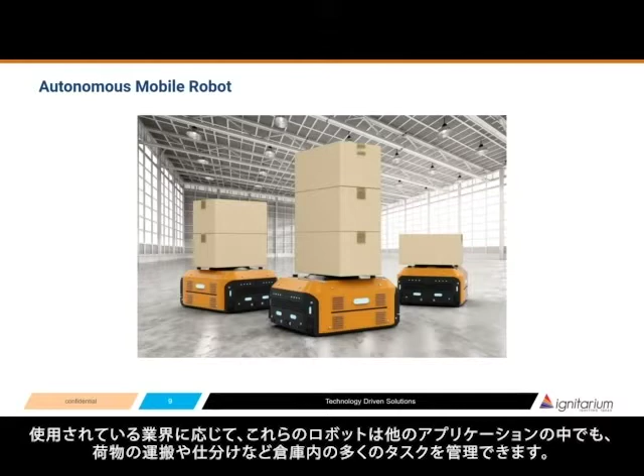So let me introduce you to the concept of mobile robots. There are mainly two options to go with, AMR or AGVs. These are robots that can manage many of the tasks in a warehouse, like transportation of packages, sorting, and many more applications.

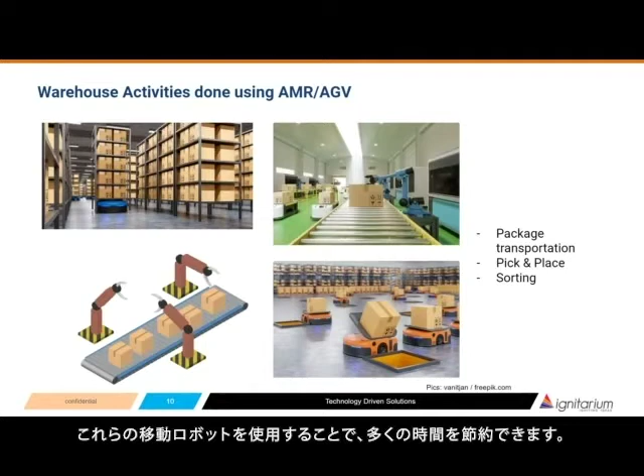Depending on the industry it's deployed in, these mobile robots could save a lot of time in package movement. So with respect to each other, AMR has an upper hand in the industry due to its scalability and cost.

AMRs are intelligent in that they can plan paths in the warehouse according to the surrounding situations, making them safer to deploy in industry. The dynamic nature of the robot makes it more scalable and cost effective, as it uses floor maps to navigate through the warehouse and obstacles.

At the time of warehouse upgradation, we just have to update the floor map and the AMRs are ready to roll out in the new workspace.

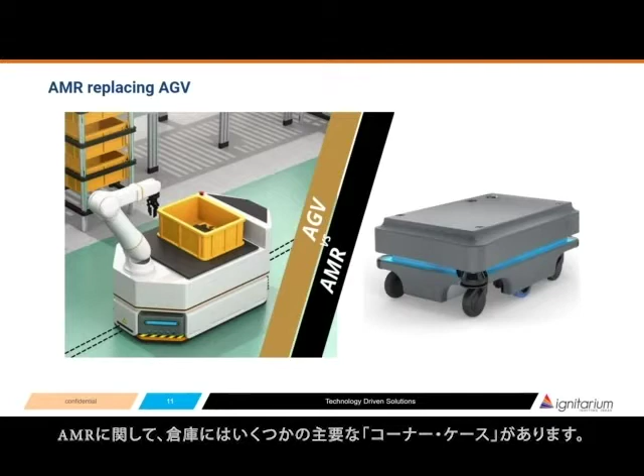As of now, we have gone through the use cases of AMR in the warehouse industry. Now let's see a few of the corner cases that have to be addressed, like navigation through a busy warehouse.

Then synchronization of the robot with external devices, robot orientation, obstacle avoidance, human safety. These are a few of the major corner cases in warehouse.

In this, we are going to primarily focus on robot orientation. Why is the orientation of the robot in a warehouse so critical? Let's see. Here you could see an image of a robot dropping a package onto a slot on the floor.

Now just imagine if the robot reaches the location, that's the point, and if it is oriented, say, 90 degrees off, then when it lifts the package and drops it, it will not fall into the intended slot, it will be lying around on the floor. Would that be what we would need? No.

Then imagine a case where a forklift is lifting a package. We know when a forklift lifts, it has to insert the fork into the slots provided on the package. Now, if the robot or the forklift is not aligned properly, then when it tries to lift the package, there are chances the package could topple.

And like a chain reaction, a lot of packages are going to fall down.

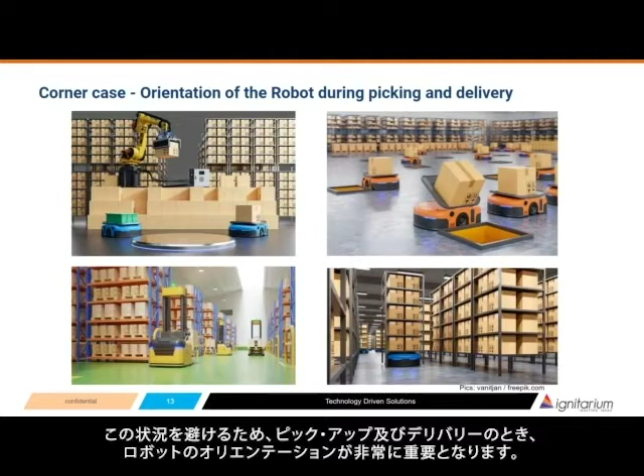So these are not the scenarios that a normal warehouse would appreciate. So here we could see the orientation of the robot during picking and delivery is pretty crucial.

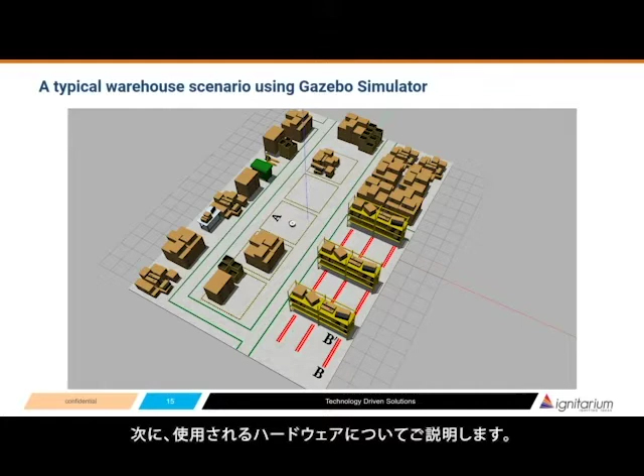In this simulated world, we are going to use the hardware Pioneer P3DX. It's a mobile robot that consists of cameras, lidars, IMU sensors, proximity sensors, and many more sensors according to the requirement and the situation where the robot is deployed. All of these are connected onto an embedded hardware which is capable of interfacing these sensors and also running the application in the background. We have a mobile base which would be carrying all this hardware on the warehouse floor.

In the previous slides, we mentioned the use cases and corner cases with respect to AMR. Now let's see how we can make it simpler and faster for development. ROS, Robot Operating System. ROS is basically a framework or a middleware that creates a pipeline for different processes to communicate with each other. Here, processes are called nodes. Each node communicates using topics and messages. ROS is widely used in robotics due to its scalability and large developer group. As ROS is an open source platform, plenty of resources are available online for your reference.

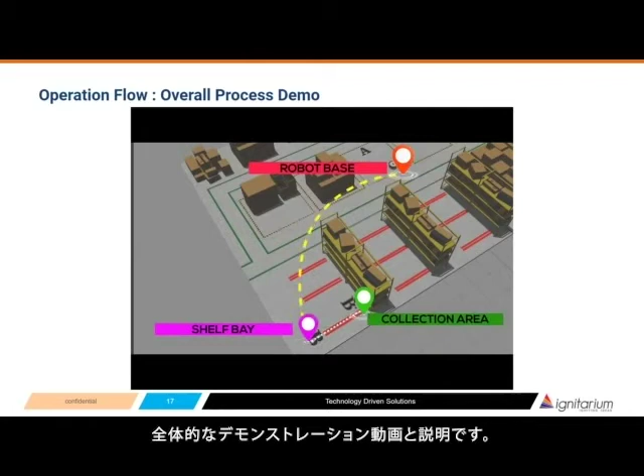Now let's see an overall demonstration of the process. Here we have set up this demonstration using the Gazebo simulated world. The robot basically has two modes of operation, that is full autonomous navigation and also action server based operation. The operator gives the destination B from which the robot has to pick up the package. Now here we could see A as the location of the robot as robot base, and also the shelf bay, that is location B, from which the robot has to collect its package.

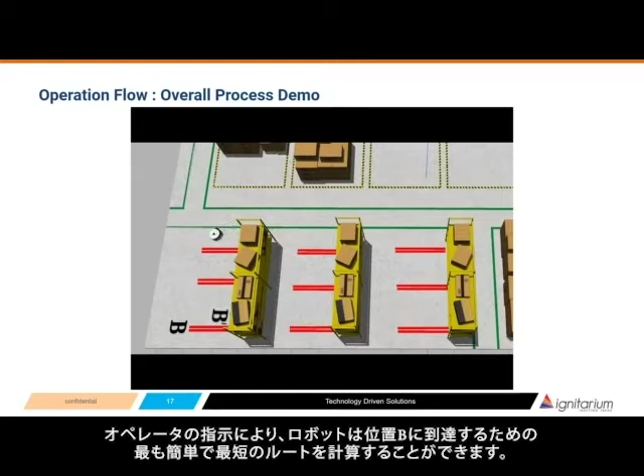For the first phase, the robot uses the autonomous navigation stack, a stack which guides the robot to move from location A to B. Here you could see the robot is computing a path and following it for reaching from location A to B, the command given by the operator. The robot is able to compute the easiest and shortest route by which the robot could reach location B.

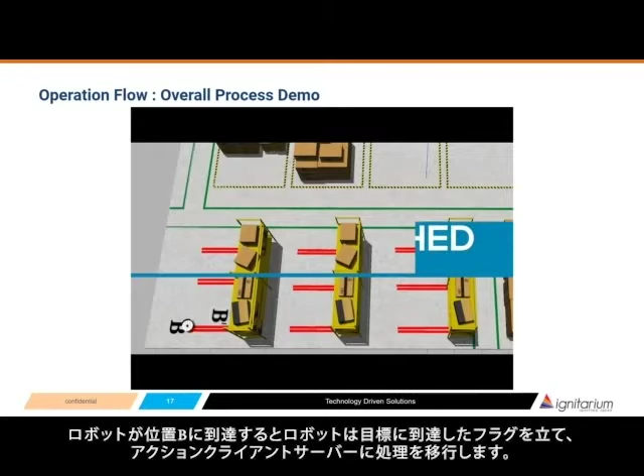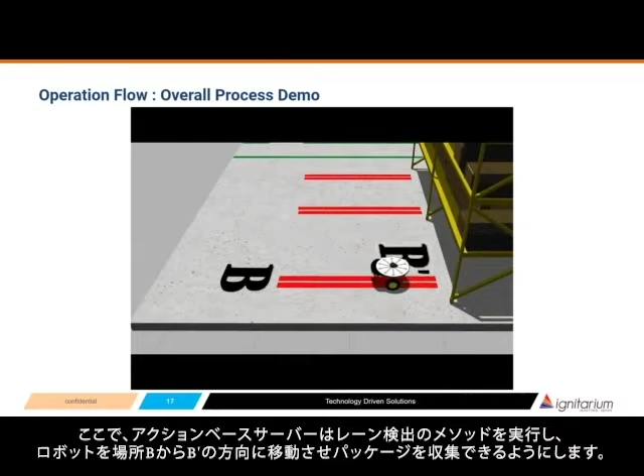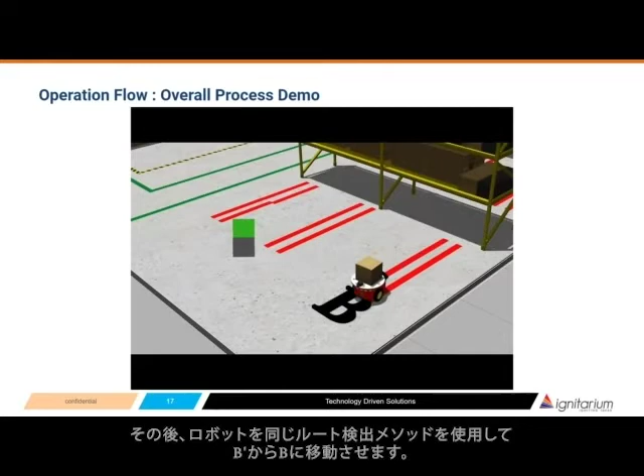When the robot reaches location B, the robot gives a flag as goal reached, after which the action client server kicks in. Here the action based server does a lane detection method to move the robot from location B to B dash, orienting the robot perfectly so that it is able to collect the package. After which the robot uses the same lane detection method to go from B dash to B. After which the robot uses the same navigation stack to go to the next location C, or it might be back to the robot's bay.

Now let's go deeper into the two phases of the process, that is phase 1, autonomous navigation, and phase 2, the action server based process. In the first phase, as we have told, it is autonomous navigation. The goal is to move the robot from location A to location B using the navigation stack. So here we know the robot is at location A, which is the robot bay, and B the destination.

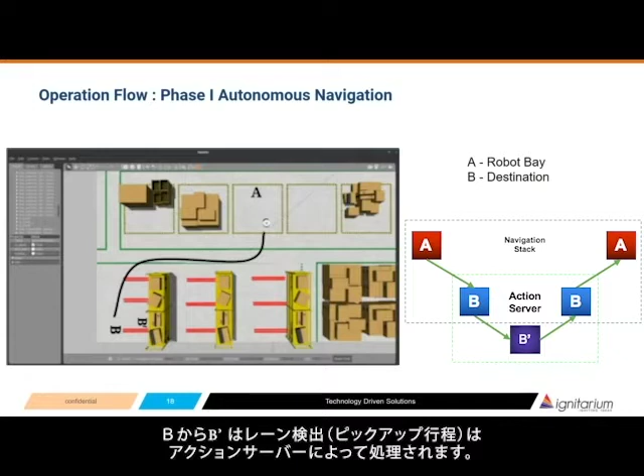B is basically a bit far from the exact location from which the robot has to pick the package. So the robot is using navigation to reach from A to B and not B dash. B to B dash is taken care of by the action server, with which the orientation of the robot would be corrected.

Before we move on with the navigation, we need to create a map of the floor. In the initial slides, I have told AMR's advantage is that AMR basically works with reference to a floor map. So we need to map the floor. AMR has an option called map building, for which we have two methods, that is manual mapping and exploratory mapping.

In manual mapping, what we basically do is, with the help of lidars or sensors, we will collect data and use algorithms to create a map out of it. In manual mapping, we will use teleoperation to move the robot manually over the warehouse floor and collect data. In exploratory mapping, we would just leave the robot free in the warehouse floor and it will map the floor on its own. And there are different algorithms used for both the methods.

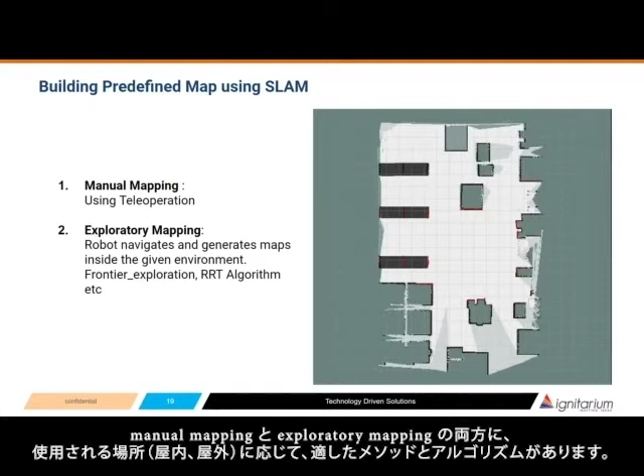A few of the methods are the SLAM methods, that is simultaneous localization and mapping. These are a few of the methods that are widely used: Hector SLAM, Cartographer, then Gmapping, ORB SLAM. There are different SLAM algorithms according to the places. These are more valid when the mapping is indoor. When we have outdoor, we have different kinds of algorithms to do the mapping.

On the right, you could see a matrix of comparison between different mapping algorithms along with different sources for the mapping. We could have Kinect, laser scanners, or a combination of laser scanner and a Kinect 3D cam with respect to Gmapping, Hector, and CRSM. That's another SLAM algorithm which is being used. And to the left, you could see a 3D map generated using depth cameras or 3D lidars, and all the different sensors are used to create the 3D map also.

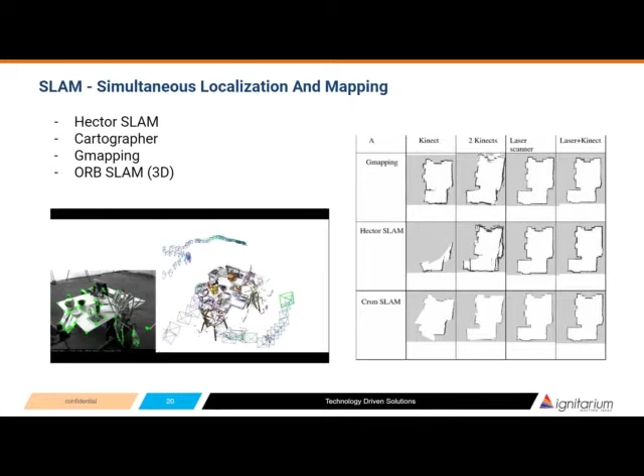Now let's come back to the ROS navigation stack. The navigation stack can be divided into four major blocks: first the sensory block, second the move base, third the base controller, and fourth the map server. The sensory block basically consists of lidar or 3D cam, which collects data from the surroundings into the move base node. The move base block is the block from which the path for the robot is computed. Inside the move base, we have basically two nodes, that is the local planner and global planner.

The global planner is responsible for computing the path in a global space, that is the rough direction for moving from location A to B. And the local planner is responsible for computing the path in a short distance. So imagine the robot comes across an obstacle. The local planner comes into play and computes an alternate path to avoid the obstacle with reference to the global path. So the global path is the one which is defined for moving from A to B, and the local path is what defines the robot's path for the few meters in action.

These two planners together give the velocity commands to the robot to move, and that is received by the base controller node. Apart from this, we have another block, the map server. We just created a map in the previous stage, and the map server will publish this map for the planners to compute a path in the global space as well as in the local space. So altogether, these four blocks are what we call the navigation stack in ROS. A detailed explanation of each block is out of the scope for this small webinar series.

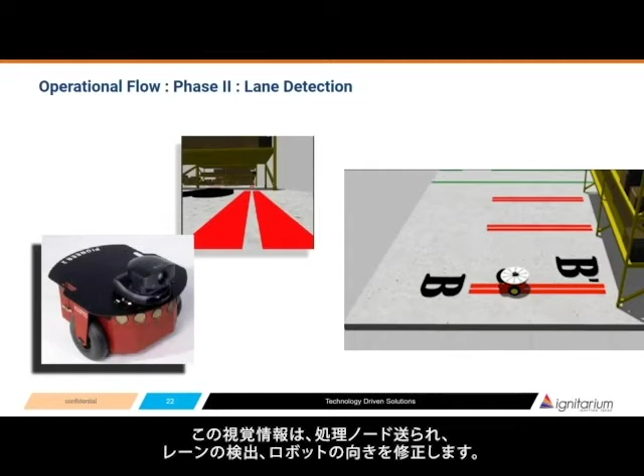Coming to phase 2, the lane detection. Here, the robot uses a vision sensor, that's a camera, to collect visual information from the warehouse floor. This vision information is fed to a processing node where the lanes are detected and the orientation of the robot is corrected. As a first step, the robot will be moving from location B to B' using the action client server method. The client will give a goal to the action server. Here the goal is B'. The action server keeps the client updated with the help of feedback messages.

When the movement from B to B' takes place, the action server keeps on updating the action client using feedback messages. During this time, the robot would use image processing algorithms and PID algorithms to orient the robot perfectly in line with the red lane provided on the floor to collect the package. When location B' is reached, the action server gives a result to the action client that the goal has been reached. The next step would be taking the robot back from B' to B, for which the same action server is used. Here, the goal would be to go to location B.

The movement would be again updated using the feedback messages, and when the location B is reached, the result is published as location reached at B. Then the robot moves on with the journey to its next destination as provided by the operator.

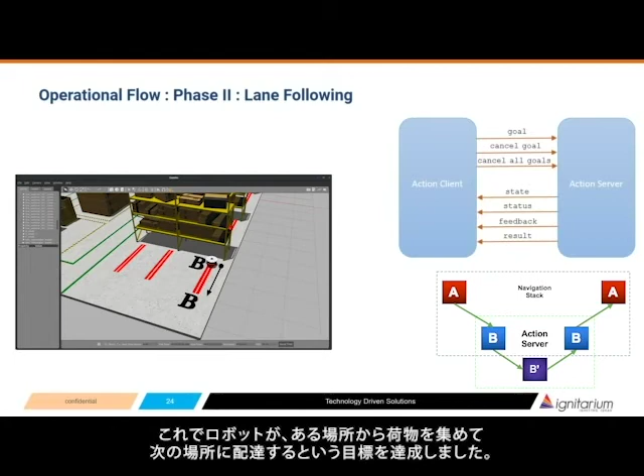Now here phase 1 and phase 2 in combination allow the robot to move from location A to B and collect the package in the right orientation. Phase 1 gives the robot the location A to B, then phase 2 lane detection orients the robot perfectly to collect the package. With this, the robot has achieved its goal of collecting a package from one location and delivering it to the next. Now let's see a few of the tools that would come in handy while developing with ROS.

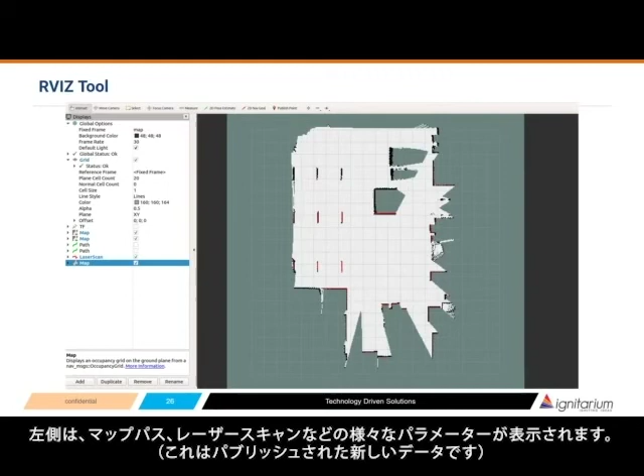The next one would be RViz. Here we could see the map that has been generated. Now when you look closer, you could see red dots. These red dots are the laser data. On the left, you could see different parameters like map, path, laser scan. All these are the data that has been published. We can say RViz is a tool to visualize different sensor data or other data.

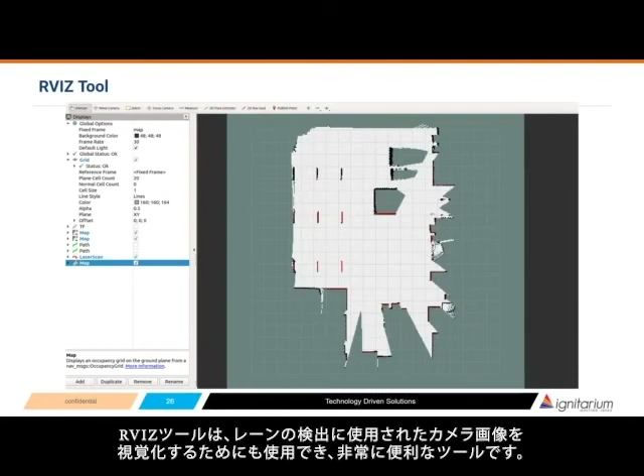Here we could add laser scans or the path that has been generated by the planners, as we discussed when we were talking about navigation. Like that, this is a tool which is used to visualize sensor data or processed data. We can even use this RViz tool to visualize the camera image that we have used to detect the lane. This is a very handy tool.

Here, the basic concept is to create models, be it the robot, a shelf, a package, whatever it is. You are going to create it the same way that we have an object in our real world, so that the object will have all the properties identical to what we have in the real world. So the Gazebo simulator is one tool with which you are able to simulate algorithms or run a lot of tests without any expenditure.

Basically, when we need to test something, getting a proper robot or a proper scenario would be too expensive. That's where the Gazebo simulator comes into play: we can use it to simulate any robot or any circumstances, and we can run our algorithms multiple times without the risk of injury or system failure, or without any risk. We are able to assess the algorithm that we have designed.

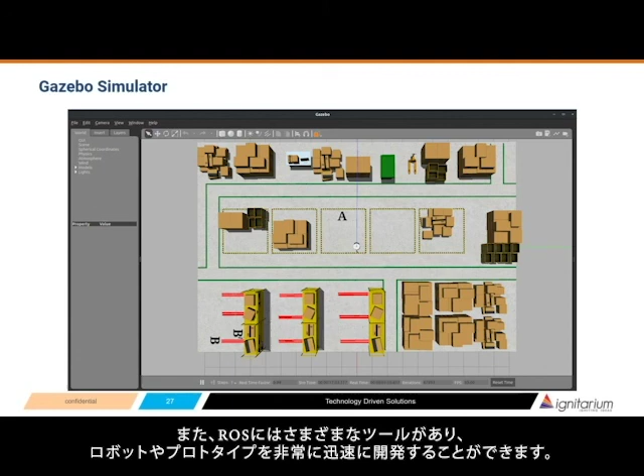Altogether with RViz and Gazebo, we are able to simulate any scenarios of our choice. With the help of RQT graph, you are able to troubleshoot the ROS architecture. And there are different tools in ROS which will be covered in the upcoming series, with which you will be able to develop or prototype a robot very quickly.

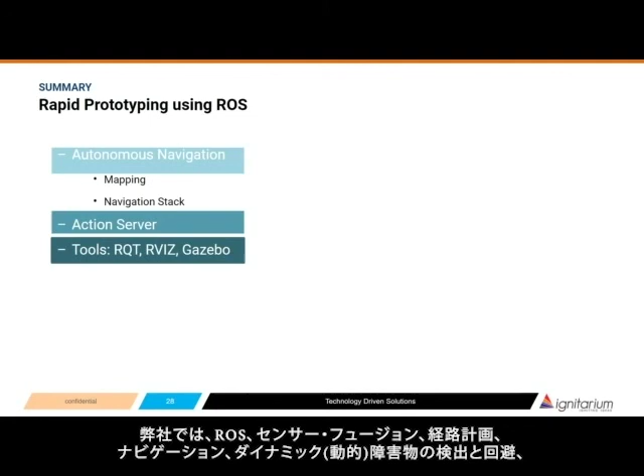To summarize this session, we started with the warehouse scenario where an AMR improved its efficiency, then the hardware architecture of the robot that we used in the simulated world. A brief idea about the ROS framework, after which we discussed autonomous navigation, in which we saw different mapping algorithms and the breakdown of the navigation stack. Then we looked at action server and client usage and a few tools in ROS.